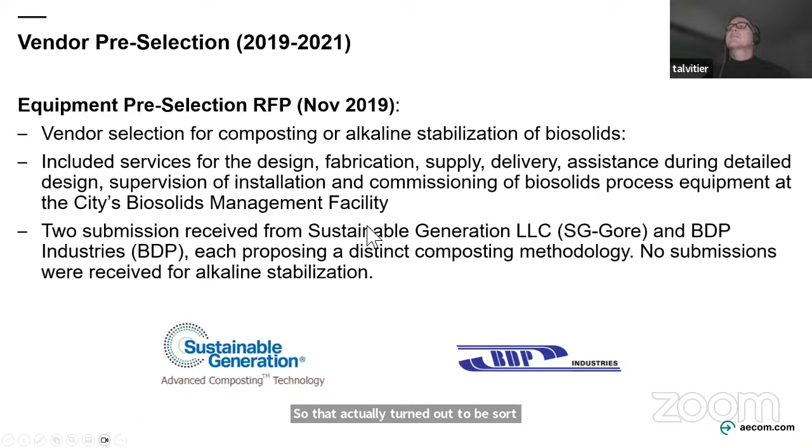So that actually turned out to be sort of a benefit for us because from there, the province went ahead and introduced the Ontario Food and Organic Waste Policy, which basically required the municipality to achieve 50% waste reduction and resource recovery of food and organic waste, which ultimately meant that the city would have to initiate a curbside source separated organics program and then process that source separated organics.

So what we and the city identified is that given that we had 2 vendors that were proposing composting technology, it was believed that these 2 vendors could likely process both the biosolids and the source separated organics. And we did reach out to both of them and both confirmed that they could. So we prepared an addendum and asked both vendors to submit a revised proposal to use their technologies for both source separated organics and for biosolids. So an addendum went out and they resubmitted based on those 2 feedstocks.

We then went through a rigorous evaluation process to select a preferred vendor. We found that both of the technologies had similar technical performance, so ultimately it kind of came down to cost. SG Gore system had a lower combined life cycle cost over a 20-year operating life cycle period. So ultimately they were selected as the preferred vendor to move forward with. What they were proposing to use was a 12 bunker system, 8 of which would be dedicated to biosolids processing, and 4 of the bunkers would be dedicated to source separated organics processing.

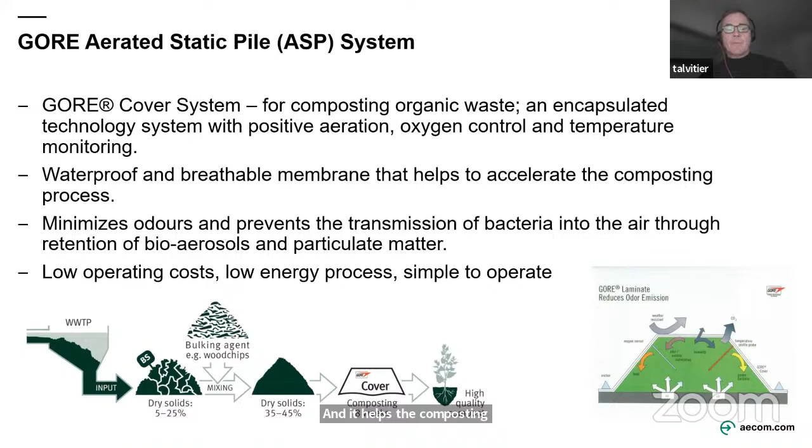I've got a photo here of what the individual Gore windrows will look like. The material is placed in these concrete bunkers. You can see down the middle there are two trenches, and those trenches have a dual purpose. They're at the far end here.

There's a blower system that forces air through these trenches and into the static pile to help with the composting process. If there's any excess moisture in the static pile, it will drain. These are sloped towards the drains, so excess moisture drains and is collected, and it's recirculated into the process because it has microorganisms that can help with the composting process.

Any water or leachate collected through this process is recirculated back into the process. Here, number 6 is the winder, the cover winder. This is a mechanical device used to wind the covers off of the piles or apply them to the piles, because they're quite heavy, as you can imagine. That's something Gore also provides as part of their delivery.

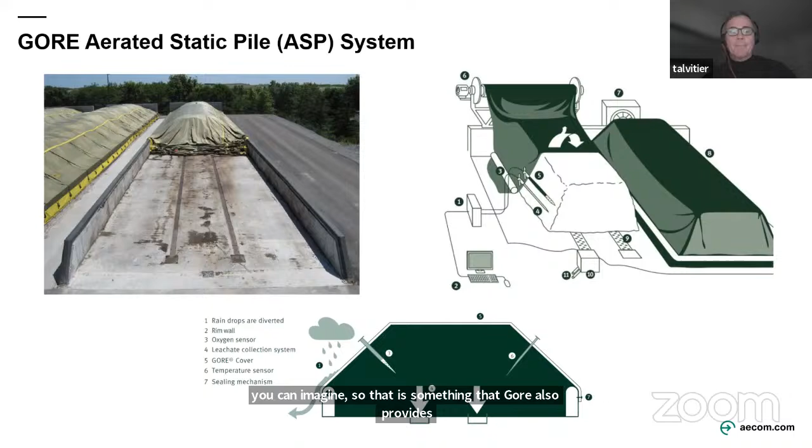This is just a slide that highlights at a conceptual level what the facility will look like. At the beginning of the process, we have offices and a scale house, which already exist at the site as part of the landfill. That's part of the reason for siting the facility there, so we can take advantage of existing infrastructure. The material will get weighed on the incoming weigh scales, so we have an accurate identification of quantity of material for mixing purposes in our recipes.

In terms of the composting process, material will stay in phase 1 for 4 weeks. It will then get transferred to other windrows, where it will reside with covers again for a period of 2 weeks. The final phase of the composting process involves another 2 weeks. So there's a total of 8 weeks to the composting process.

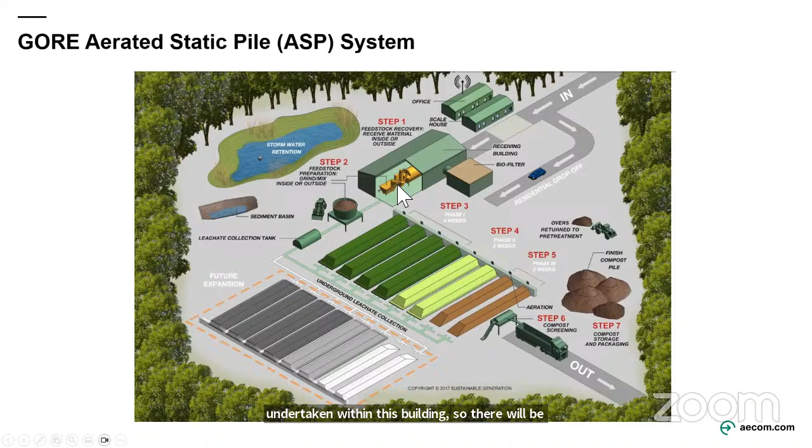So now talking about the design parameters, first we'll talk about the biosolids. Generally, we're generating close to 9,000 wet tons of biosolids per year from the 2 sewage treatment plants. When we look at population increases over a 20-year time frame, that could grow to slightly over 10,000 wet tons per year. We then looked at peaking factors.

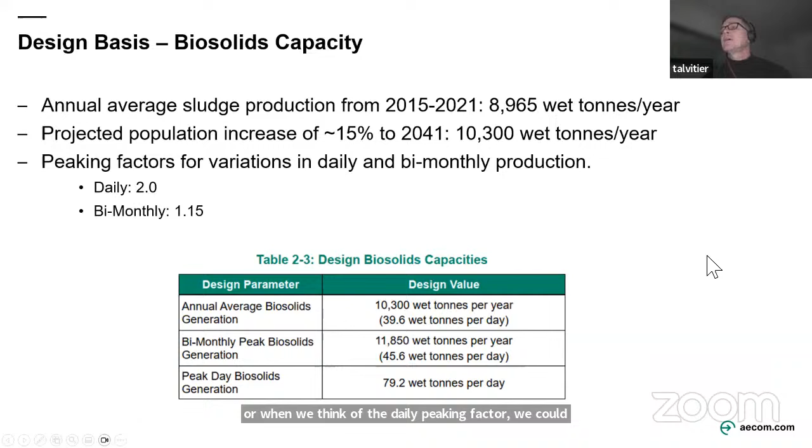On a daily basis, we could see as much as twice as much as we would see on a typical day. And on a bi-monthly basis, we could see a 15% increase in the amount we receive. So in terms of the design of the facility, when we think of the bi-monthly peak, that 10,000 could grow to close to 12,000 wet tons per year. Or when we think of the daily peaking factor, we could get as many as 80 wet tons per day. So those are the parameters used in the design of the facility.

I won't go through this in detail, but as I mentioned, we've got 11,850 tons coming in potentially that have to be accommodated. We add the bulking material to it. It's on a 1-to-1 ratio, so we need 11,850 tons of bulking material, leading to a requirement for 23,700 tons per year of bulking and wet biosolids.

When we worked with Gore on the design of their bunkers, ultimately we have quite a fair bit of reserve capacity there, because the facility is ultimately going to be able to accommodate about 30,000 tons of materials. With those 30,000 tons, they'll be accommodated, as we talked about, in 8 bunkers. Each of the bunkers will be 50 meters long, 7.8 meters wide, with a maximum height of 3.7 meters. So there's, like I say, 8 bunkers, 50 meters each, and that'll accommodate close to 30,000 tons per year.

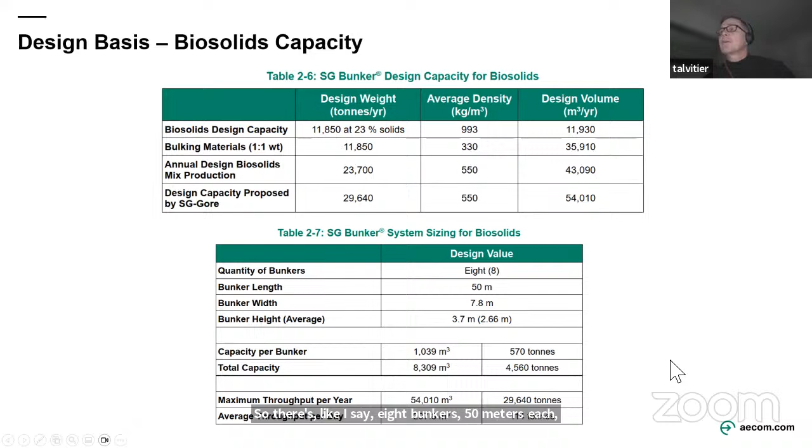Then if we go to the SSO, we went through various methods to approximate how much SSO we may collect from residents as curbside. Ultimately, through various methodologies, we came up with a recommendation to accommodate 4,000 wet tons of SSO per year, and then to accommodate some non-residential organic material, we decided to increase that by 25%. So the ultimate design capacity of the facility was intended to be 5,000 wet tons per year. With a daily peaking factor of 2, that means we'd have to accommodate between 38 and 39 wet tons of SSO per day.

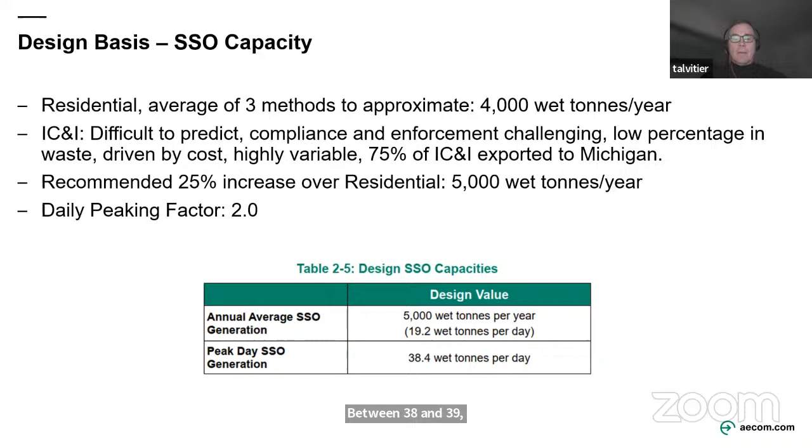If we go to the design basis again, in this case, we only need half as much bulking material. So we have 5,000 wet tons of SSO, add our bulking agent, that gives us 7,500 tons of SSO mix per year. Ultimately, the facility is being designed for 8,600, so again we've got a factor of safety there, or some reserve capacity built in. That led us to a need for 4 bunkers, each 30 meters long, the same width as the other bunkers at 7.8 meters, with a maximum height of 3.7. Ultimately, that allows us to accommodate close to 8,600 tons of SSO and bulking material.

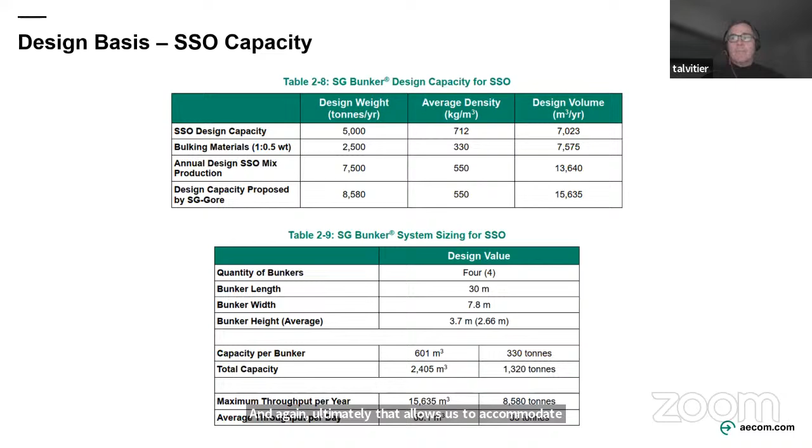Question with the bulking material. Are we going to have problems with supply, or is that going to be an added cost possibly?

There is going to be cost associated with it. It's a very difficult item. We have talked with various wood waste suppliers, and they can supply the material. Obviously, it's like any raw feedstock, such as wood waste - it is driven by supply and demand in terms of cost. So we've talked to them. They've basically said it depends on what other industries require in terms of if they're asking for the material as well, and we recognize there are other competing interests locally within the economy that want to use wood waste. A number of them said they could produce the wood waste, there's not a problem with it. Obviously, the cost will be driven by supply and demand, so it's hard to predict what the cost will be. We do understand what the cost would be today, but what it will be in the future is difficult to predict.

I see Dave McLaughlin's hand up. Go ahead, Dave.

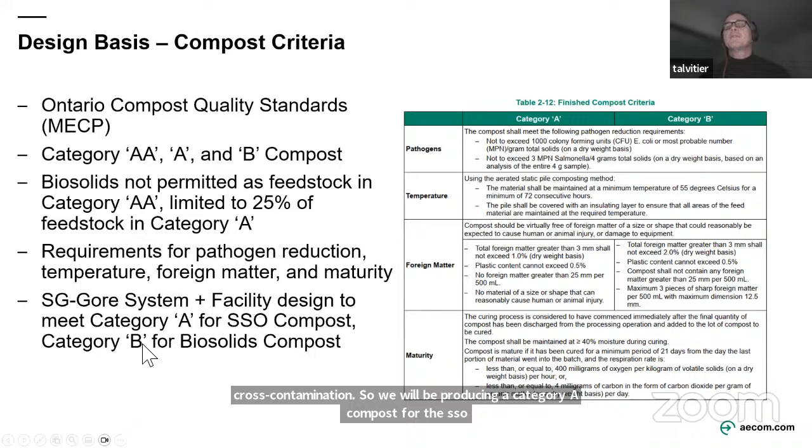The category A compost can be used for various municipal projects from the parks group, from the cemetery group. We are currently using composted leaf and yard waste for city projects, and we will now be able to use the composted SSO compost for city projects. The category B compost will be mixed with native soils from the site and used as cover material. There are various criteria that have to be met in terms of pathogen kill and temperature - we've got to be at least 55 degrees for a minimum of 72 hours, relating to pathogen kill - and there are requirements for foreign matter and maturity as well.

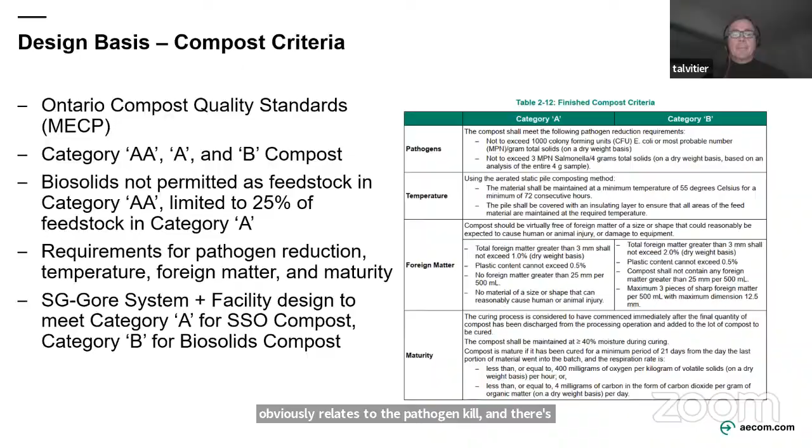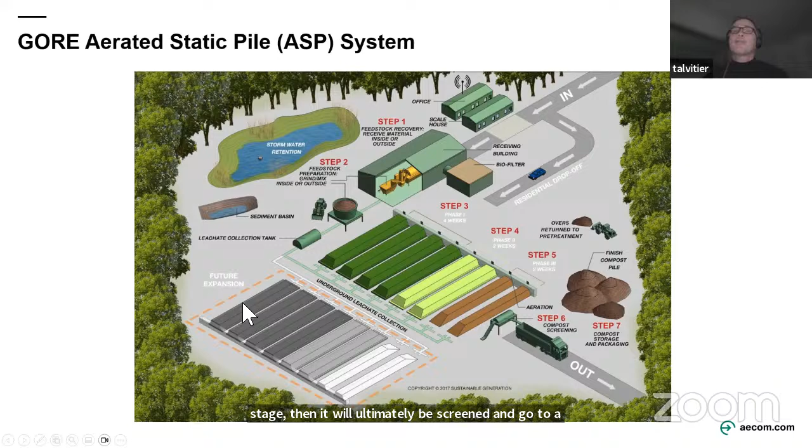So in terms of the overall project scope, just to revisit this initial conceptual design, we've got the scale house, administrative buildings, pass over the scales, go into the receiving building, tip the material, mix the material, and all the odorous air gets treated through a biofilter. It then gets loaded into the first stage of the composting process, and after 4 weeks, moves to the second stage. 2 weeks later, moves to the third stage. Then it will ultimately be screened and go to the final stage of curing. So to look at each of those separately, let's first look at our landfill site.

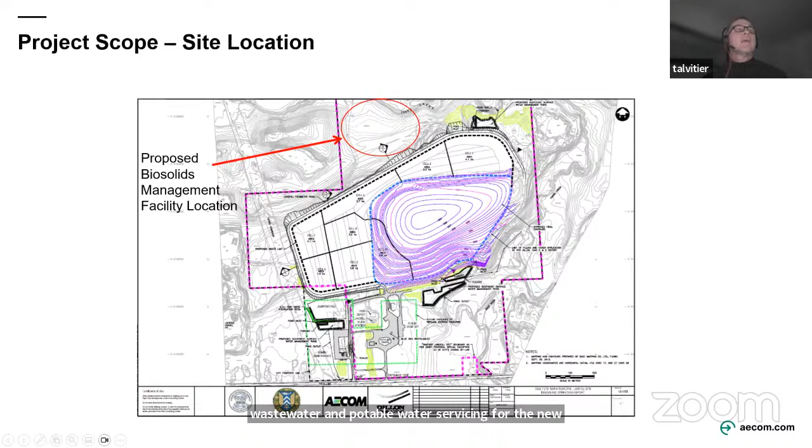So as we talked about, there's certain infrastructure elements on the existing site that we can already take advantage of. We don't have to, as part of this project, build new waste scales or a scale house. We'll be able to use the existing waste scale and scale house to provide accurate quantification of the various feedstocks coming in, and that will be important to know for our recipe in terms of mixing with amendment products. And then we have operator facilities already at the landfill site in terms of showers, locker rooms, and administrative offices. So this is excluded from the biosolids management facility design because it already exists.

So then looking at what we do need: we need a receiving building with a tipping facility. Within the building, we'll be tipping the two different feedstocks, both SSO and the biosolids. They will be tipped in separate areas of the receiving building. Within that building, we have feedstock conditioning and amendments. So again, the wood waste will be mixed with both of those feedstocks, thoroughly mixed within the building itself. And once those mixes are produced, they will ultimately get moved out into the field, into the windrows, as we talked about.

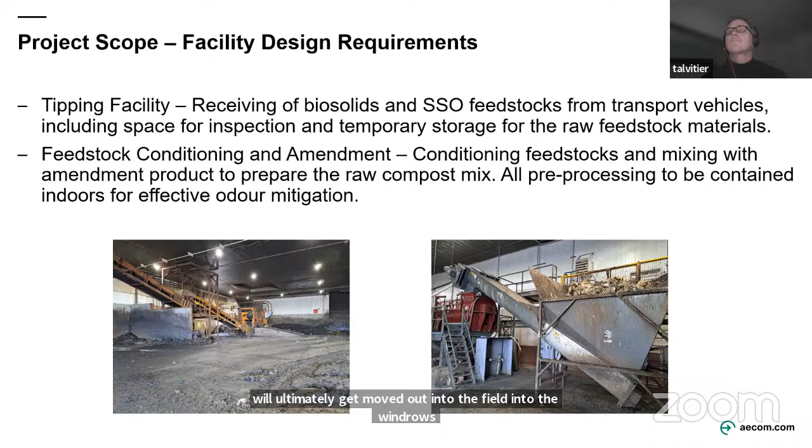So we do have a fairly large area on site that is dedicated to amendment product processing and storage. We do want to make sure we're able to store a fair bit of the wood waste amendment product to allow for fluctuations in seasonal supplies of that type of material. Obviously more of that material is probably available through the spring, summer, and fall months, so we want to be able to store a fair bit of that material on site to address seasonal fluctuations in availability.

We have the SG Gore pre-selected equipment. As we talked about, they will be providing basically their cover systems. They'll be providing the cover unwinder and winder. They'll provide the blowers for aeration. They'll be providing the control systems and probes that will be going into the various windrows. And ultimately, they'll provide software to control the process.

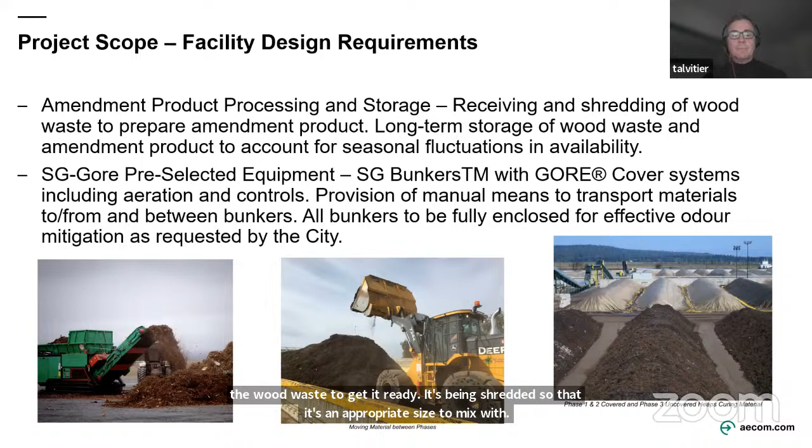As we talked about, the odorous air will be collected from this building and delivered to the biofilter. As that odorous air is delivered to the biofilter, it will be heated at the inlet. We do want the air going into the biofilter at approximately 10 degrees Celsius, because that is the temperature we'd like to see to maintain the biological community in the biofilter. The biofilter relies on a biological community to remove odors in that air and to make sure that community is thriving and not dying. We need to maintain the temperature within the biofilter at about 10 degrees Celsius.

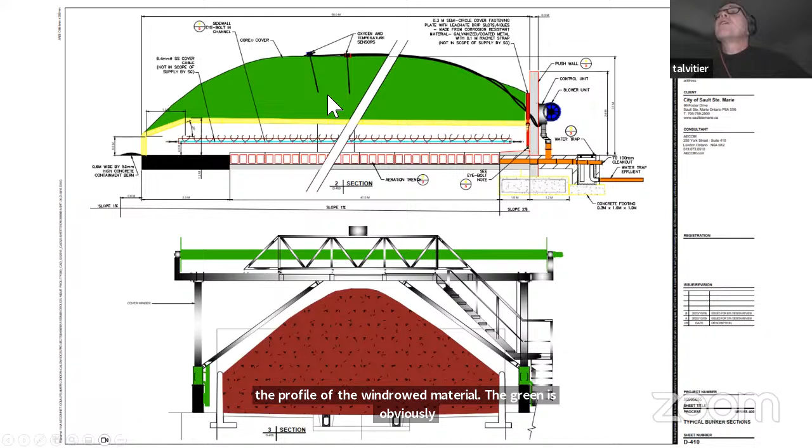At the end of the bunker, looking along the profile of the windrow material, the green is the gore cover. You can see temperature and oxygen sensors that go into the pile, and that information is relayed back to a control unit. That control unit then dictates when the blowers will turn on to add additional air into the system, so they're highly controlled by the sensors and probes in the windrow material.

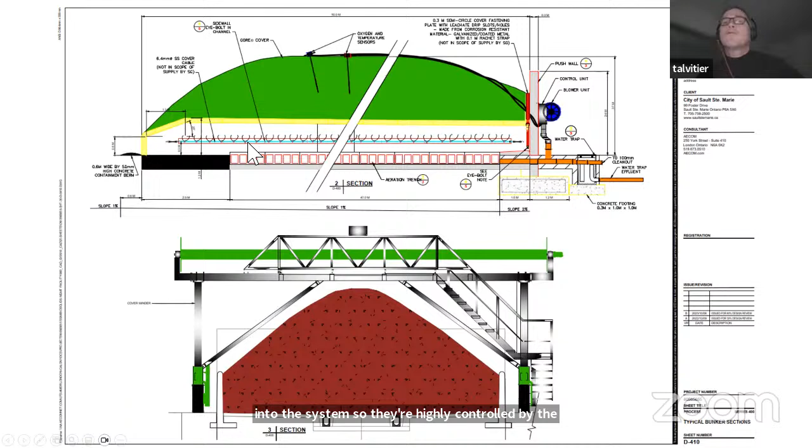And this here is the winder. This is the equipment used to take the cover off of the static pile or to place the cover across the static pile.

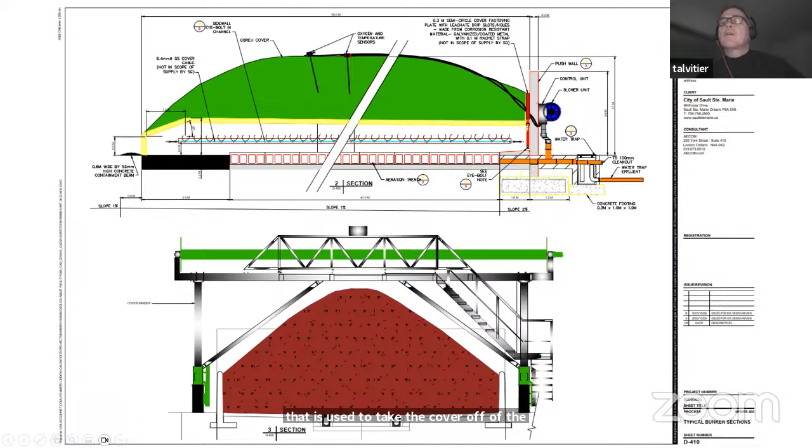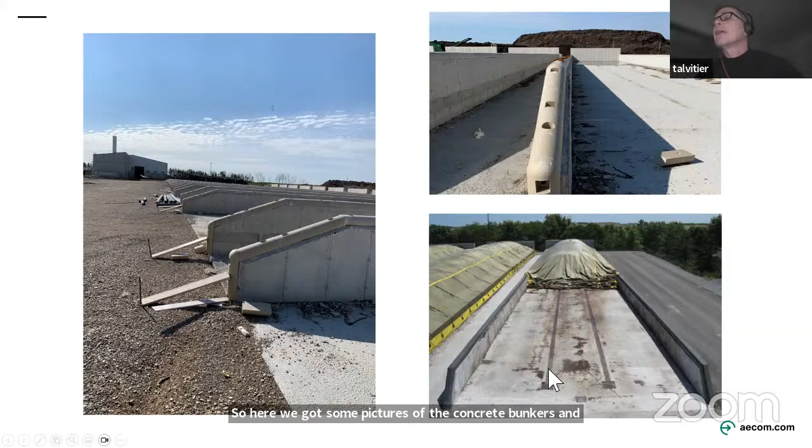Here are some pictures of the concrete bunkers with knee walls. Again, you can see the trenches down the middle serving the dual purpose of introducing air into the static piles and collecting any excess moisture, and you see the gore covers over top.

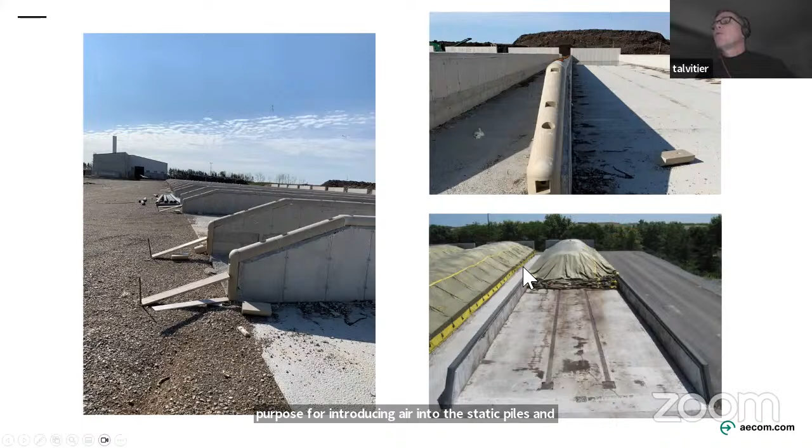We talked about leachate management in terms of collecting leachate or excess moisture in those trenches. For final screening, the material is delivered to a screening process with a front end loader. It goes through the screening, and the larger material is stockpiled separately from the compost material. The compost then goes through a curing process for a couple of months following final screening, and the overs, or larger material, get stockpiled and reintroduced into the process.

This reduces our wood waste product requirements. When we first start the process, we require a large amount of wood waste, but a portion is recovered from the process and reintroduced into it. So in subsequent years, the amount of wood waste we have to source becomes lower as we're able to reuse some of it as the process continues.

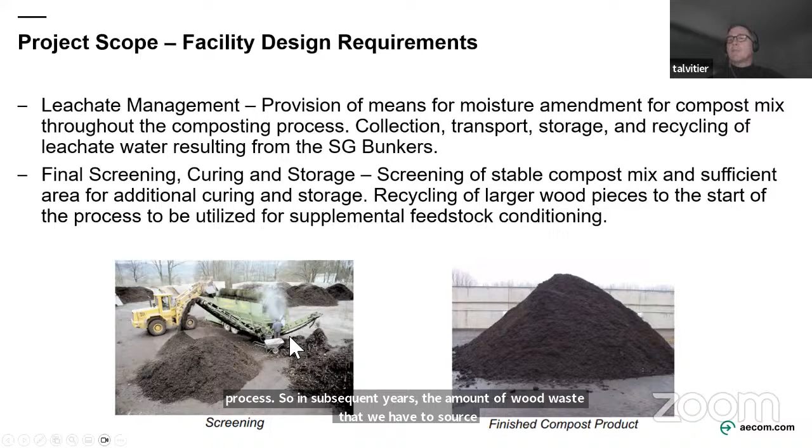In terms of other requirements, we talked about odor control. There will be a biofilter constructed to manage the odorous air from the receiving building. We need services for the facility, including hydro, water, wastewater, stormwater, gas, and internet. There will also be a control building used to house the mechanical and electrical equipment and a washroom.

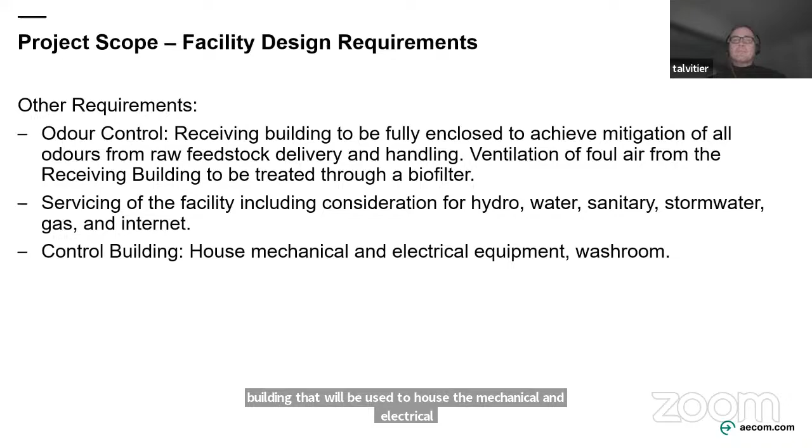In terms of project cost and budgeting, we're currently working on the 60% design. We had produced an original 60% design, and when we looked at the cost relative to what the city has available for budgeting purposes, there was a need to look at cost-saving measures. We went through a cost-saving program, and now we are working on a 60% design projected to cost in the range of 43 to 56 million.

That cost is inclusive of engineering costs as well as all the necessary equipment that must be purchased to assist in the operations of the facility, including front-end loaders. That cost will be refined further as the design progresses and we move to the 90% design phase and the tender phase of the project.

We're currently looking to update the 60% design by the end of the year and then move towards tendering the project in 2025.